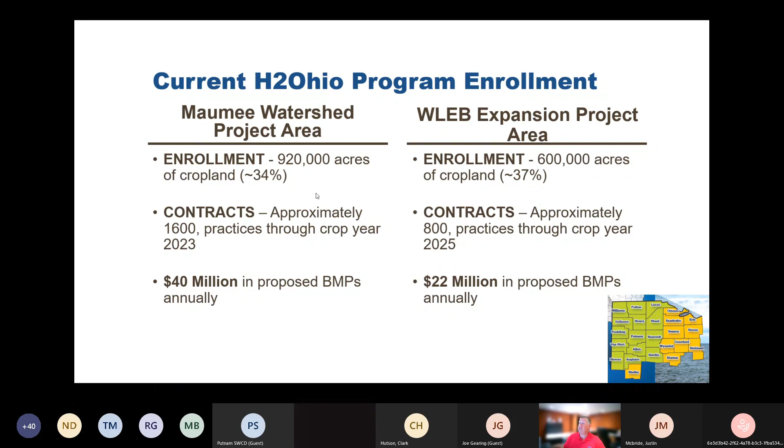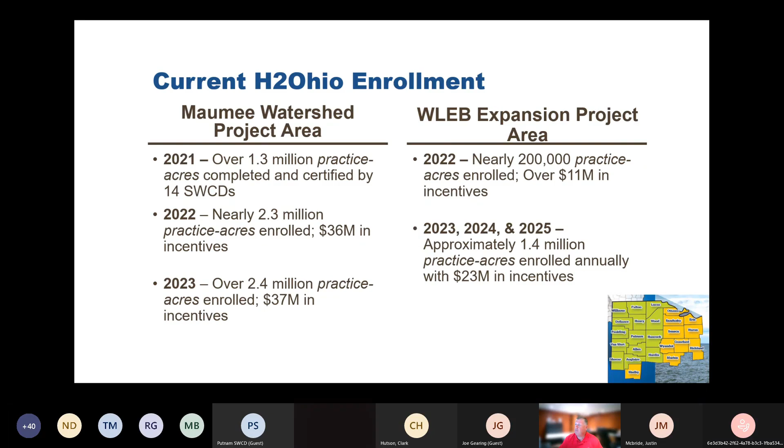Really what we're looking at is trying to maximize the amount of practices that we have installed. You can see for 2021, we had about 1.3 million practice acres, so that's 1 BMP on 1 acre equals a practice acre. Looking ahead, we have nearly 2.3 million practice acres enrolled across the Maumee and about 1.4 million practice acres enrolled across the WLEB expansion area.

One of the things as we look at where we're going with H2Ohio, our focus has been for the past couple of years on the cropland management practices, trying to get those up and off the ground. We are continuing to look at the other practices. We'll talk today about the 2-stage ditches. We'll continue to provide incentives for that effort.

The other thing ODA is doing right now is we're starting to build the next biennium budget. All of the H2Ohio funding across all of the departments, EPA, ODNR, as well as ODA, comes through the biennium budget, and we're just starting that process of updating it now. It looks, from what we can tell right now, that funding into the next biennium has a lot of support from both the governor and the legislature. So we expect similar numbers coming in the 24-25 budget.

But with that said, there's also obviously a long way to go. We've got about just a little under a year-long budget making process until we get to the final results of this. So, Justin, that's my real brief update. I don't know if there's other things that you wanted me to hit real quick. I certainly can, but if not, I'll pass the floor to you.

All right, thanks, Terry. No, I think that did well. That's a good intro on what H2Ohio is generally. We'll go into the more specifics here, which is 2-stage ditches. Let me share my screen. Just a second. Here we go.

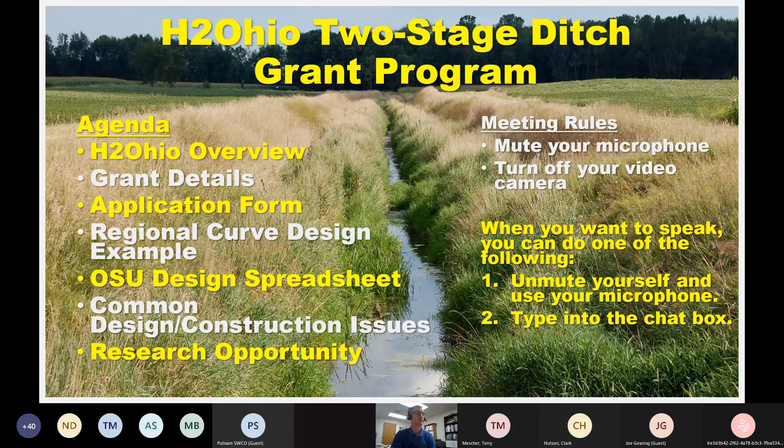And then once I get through my part, which is the first couple of pieces, I'm going to switch it over to a professor from OSU to help go through some actual design guidance spreadsheets that he's got, as well as some issues they found on previous ditch projects. So I suppose before we get into the meat and potatoes of the program, hopefully most of you on this call has at least heard of a 2-stage ditch and have a general understanding of the concept.

Essentially what we're doing is people like to call this a ditch within a ditch. And I don't know if that's exactly true, but basically we take the existing ditches that we typically have in the agricultural setting, which is standard trapezoidal ditches sized to carry a certain storm. They do a good job at that storm, but when you get these smaller flows coming through throughout the year, which is most of the year, quite frankly, it doesn't do as good a job transmitting those downstream.

So you get a lot of things like in the Western Lake Erie Basin in particular, you get a lot of sediment accumulation. That's exactly why we have a pretty intense maintenance program up here where we're going around dipping ditches every year. The two-stage ditch is simply, we're going to leave that bottom part of the channel generally, and we're going to pull the top banks back.

And what this allows is smaller flows will easily go through that short inset channel. Then anytime we get any kind of larger flows than normal, they can spill out onto the benches. It acts like an extended floodplain, and you get all kinds of benefits from that. There's a number of things that happen when you implement a two-stage ditch design.

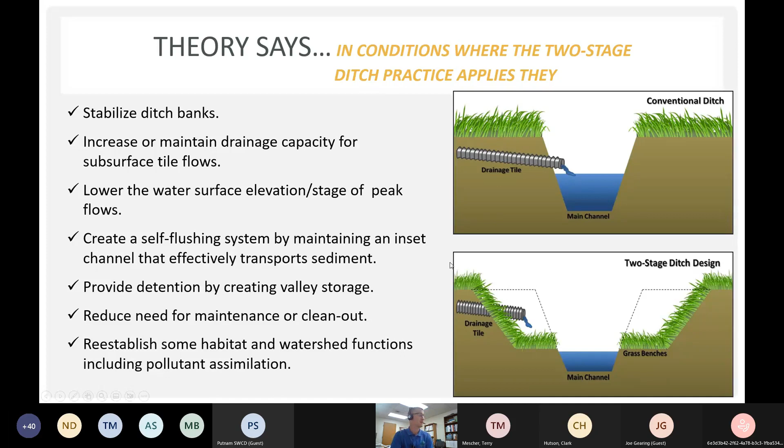Generally, when you have a ditch system that's unstable, you have a lot of bank erosion. Two-stage ditch designs are typically more stable than what the typical trapezoidal design would be. But there are a lot of other improvements that a two-stage ditch system has over a trapezoidal ditch: increased capacity, lower velocities, and things of that nature. We'll go through a bunch of that stuff towards the end here.

This program is going to have a couple main goals. Our goal when we were building this program at ODA was to keep it as simple as possible, use existing infrastructure as much as we can to get ditch improvements out there, and just have a couple overall guidances.

Whatever project we do through this grant program, the final project, once it's completed, is going to be placed on the county maintenance program. That is simply just so that we can ensure long-term success of this project. Not that we expect there to be much more maintenance than the existing trapezoidal ditch. In fact, it's probably going to be less typical maintenance, especially when it comes to dipping out.

But we just want to ensure that there's no kinds of issues that might occur during construction or things of that nature that just get overlooked and don't get addressed after it's built. So that's key number one: whatever project goes through this grant must be placed on the ditch maintenance program in the county.

Some counties are different. That maintenance program may be with the county engineer, might be with the soil and water conservation districts. It doesn't matter. It's got to be placed on that program.

The other goal is we want to make sure whatever two-stage ditches we're putting through this program meet some sort of regionally accepted design criteria. In other words, we're not going to accept a ditch application that is simply what's existing out there, doesn't meet a two-stage ditch design by any standards, but they were just trying to fit it in just to get cost share for the ditch construction.

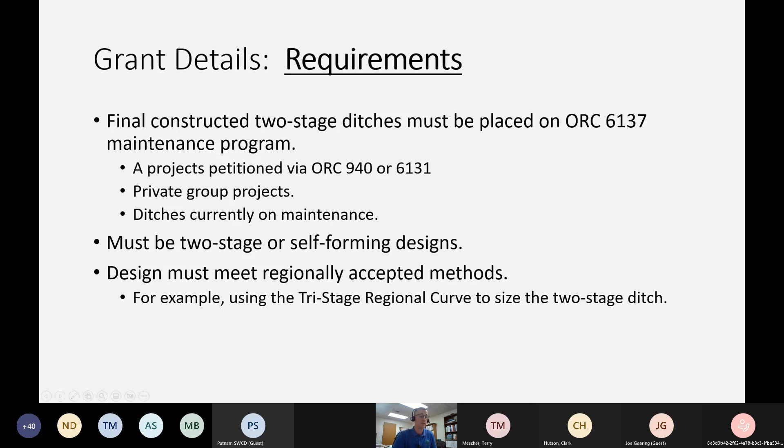So we do want to make sure we're doing the best job as possible to getting these things sized and designed as appropriately as we can. So those are kind of the overarching goals of the program. Everything else was just kind of building out to make sure that we can make this as simple as possible while still getting these out there using the existing petition laws and other ditch improvement methods that we have on the books.

When dealing with two-stage ditch design, there's two that's going to be acceptable for this program. The basic one is the two-stage ditch design, which is just what I said earlier. You're digging down to a foot or two above the bottom of the channel, and then you're leaving that bottom down there for a certain width, and then you're pulling the banks back over top of it at a certain height. So basically you go down here and you pull the banks back and you've got a two-stage ditch.

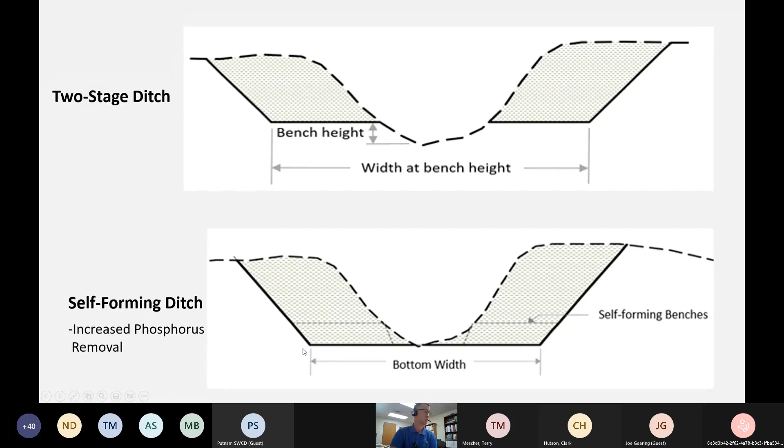For these applications, I'm going to go through the application form here in a second. For this first iteration of the program, like Terry said, it's only applicable in the existing 24 counties that have access to H2Ohio agronomic funds.

Once the applications come in, they're going to be reviewed by us, ODA staff, and approved or denied. The things we're going to need as part of the applications will give us an idea of exactly where it's going, what kind of ditch you're going to be building, what kind of design it's going to be, and what other types of structures and issues you're going to have that has to be implemented with this project.

That's that same area that we talked about earlier with Terry's presentation.

The way the process is going to work is once you turn in the application to us, we're going to go through and do our internal reviews. There's a couple of things we'll look at as we go through those reviews. But once we decide that you meet the minimum bar of what we think is acceptable for a two-stage ditch, we'll approve this project. Then we will develop an agreement that you will have to sign with us, putting the dollar amounts and all the agreed upon steps in writing, so that we can reserve funds from the H2Ohio pool internally until the project is built. Then we can reimburse the billed amounts or what was asked for, whichever one is less.

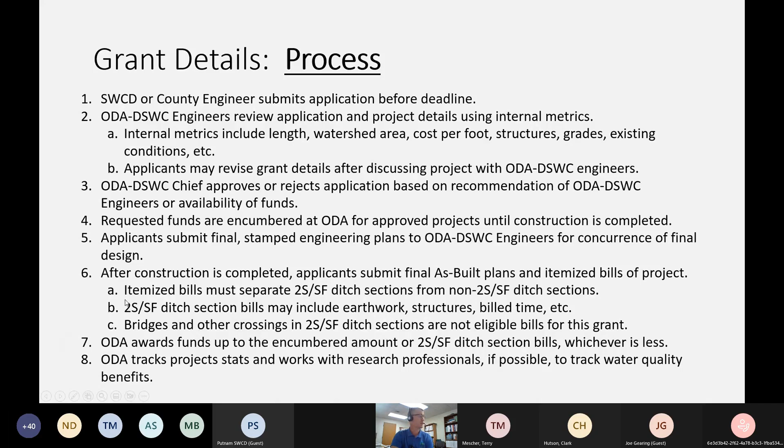Okay, so we'll go to the next slide here. If you got my email I sent out yesterday afternoon, for those of you on that email chain, you should have a copy of this application form. If you have that available, it's probably going to be easier for you to look through it as I go through this stuff.

But if not, hopefully you can see on screen. I've got the whole sheets here, so you might have to squint if you don't have a screen big enough for this section. First page here, just to cover - important part is down on the bottom.

You can see the application period is yesterday through November 30th. If we get to the point where we have a low amount of applications coming in and we get closer to the end, but we hear that there's several on their way that just haven't been fully developed yet, we may extend that a little bit, but that's going to be at our discretion as needed.

And any other future program that we have - let's say this is the 2022 application period, we may have a 2023, we may have two in 2023. This may be the first and only. All those things to come will be at our discretion as well down the future.

First page here, just some general information about H2Ohio. Terry covered most of that stuff, how the money works out. The big one here is in the third paragraph - you can see that we have allocated $5 million for the initial offering of this two-stage ditch grant program.

That's something we'll keep track of internally as we go. Just know that $5 million could increase, could decrease. The way H2Ohio funding has worked is that there's been some slippage in some of the other programs, and so generally there's a certain amount accessible at any time. So we may be able to go over that $5 million, but right now that was the goal for this first iteration of the program, certainly.

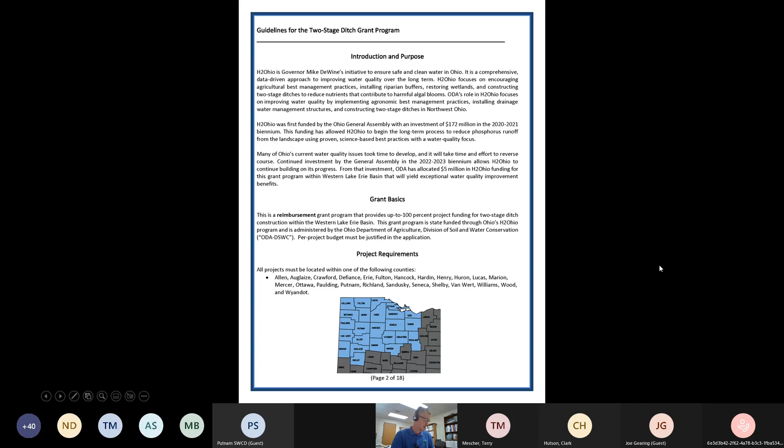Then just below the grant basics, you can see the first sentence says this is a reimbursement grant program that provides up to 100%, not exactly 100%, up to. And I'll talk about why you might not get the full 100% if you apply for this.

Okay, going to the next page - this is page 3, Part 1. Again, I talked about the two types that are eligible. We'll go into more of those design equations later.

Part 2: projects that would be ineligible for this program. Again, if there's no way it can be placed on the ditch maintenance program in the county, we're not going to consider it acceptable. There may be other grant programs out there, maybe some 319 GLRI grants that are separate from this, that you might be able to get enrolled in. But for this one, it's got to be on that ditch maintenance program - no questions asked.

Any projects outside the eligible 24 county area - originally we had thought about maybe cutting the break off at the watershed border, which cuts through a bunch of the border counties. We decided for ease of implementation not to worry about that - all of the counties shown on the screen are going to be eligible, even if it's outside the watershed. There might be some funding differences about what fund pool it comes from, but that's not anything you guys have to worry about.

Part 3, for the allowable costs for this program, what can you submit to get reimbursement for? First, obviously staff time. If you have technical assistance for the project, you can certainly record and request all of that.

The earthwork, obviously, with the two-stage ditch, as I talked about, you're going to be pulling the banks back. You're going to be making a much wider ditch. There's going to be a lot more earthwork, so obviously that's going to be the big expense of most of these projects.

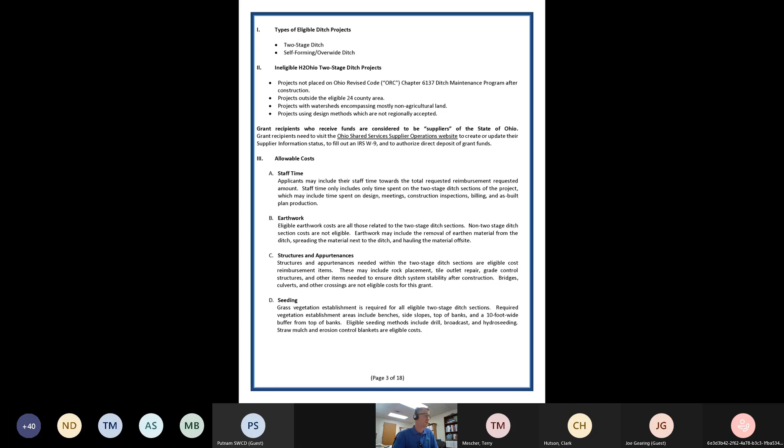Couple things here in that first paragraph. There's one sentence that says ODA is not responsible for future maintenance costs as required by the established county maintenance program. The idea is once this project is completed, once you've been reimbursed, it is entirely the county's baby. We have no more strings attached to it, which is good both ways.

There's nothing we can tell you later on that you have to do, but also there's nothing later on that you can come to us and say, well, this is ODA's project, you should have to fix it, ODA - that's not going to be the case. Once we've reimbursed, it's a clean severance. It is now the county's ditch and their responsibility to take care of.

Part B under section 4 here is eligible applicants. Again, the only people eligible for this program are going to be the Soil and Water Conservation District and the county engineer for each county. Some counties have soil and water districts that do ditch petition projects, and this will fit right into their program. Others do not have that, and so those counties may have a struggle to go through the standard 940 process. In those cases, you may want to work with the county engineer to maybe put the application through them, but you can still work with them to provide support and things of that nature.

Private landowners are not eligible, not directly - these are going to be multi-landowner projects. Obviously, that's why we're trying to target most of the petition projects going through here. You will probably have some landowners coming in and say, I hear there's a new program for 2-stage ditches, I want to apply. That's not how this is going to go.

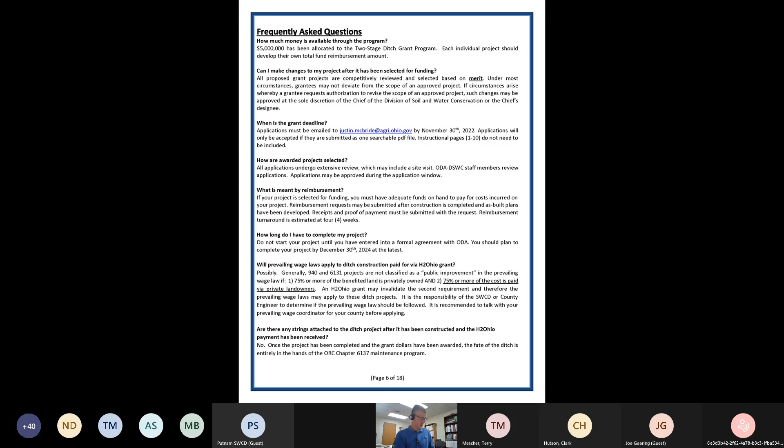All right, let's go to page 7. What additional management is required on 2-stage ditches beyond normal ditch maintenance? We'll talk about this a little bit later, but there's not really a whole lot more that's expected. If you're currently spraying the ditches for noxious weeds and things of that nature, you'll probably continue to do that on 2-stage ditches. We're certainly expecting less sediment to accumulate in these ditches just by the nature of their design.

But there may be some additional spraying. You can design entrances to get down to the benches if you want to mow the benches and things of that nature. There are things that you can do. So certainly keep in mind that the maintenance may be a little bit different than a typical trapezoidal ditch, but we're hoping it's going to be less overall.

So are all sections of the ditch project required to be 2-stage? Absolutely not. If you have a ditch project that's a couple miles long and based on the local landowner who's there, you can only get in maybe 3,000 feet of those 2 miles, then that's totally fine. Just know that we can only pay for the reimbursement for the sections which are actually constructed to 2-stage ditch. So certainly flexible there.

What if the H2Ohio grant doesn't pay for 100%? That's where your normal watershed assessments for a petition project would come into play. So whatever's extra, whatever's needed, certainly use those methods to get the funds that are required to finish the project.

Does ODA pay for the additional top width easement needed for a 2-stage ditch? As we'll get into, 2-stage ditches do require wider top widths overall, typically. And so that's ultimately one of the complaints, one of the resistances from farmers, is that they don't want to give up that much land, or that much additional land, I should say. And while we're not putting that outright in the application form, certainly if a county engineer feels that it's appropriate to pay a landowner for taking their farm ground away from them, they can put that certainly in the cost request for this application, but it's not required.

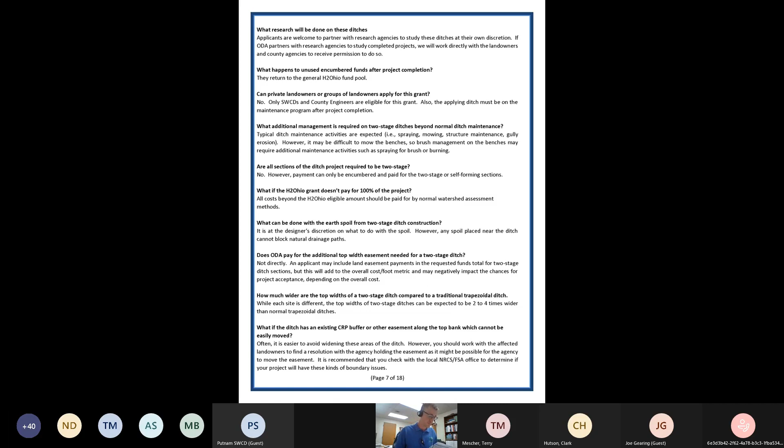Okay, page 8, H2Ohio two-stage ditch projects application process and timeline. During this application period from now to the end of November, we're going to be receiving applications and looking through them during that window. If we think projects meet the minimum bar, we will try to get agreement forms put together as soon as we can to get those signed. So there may well be projects with signed agreement forms for funding before the end of the year. That would be ideal, but as long as the application comes in before the end of November, all those can be weighted together.

The agreement deadline we've set is the end of the year, December 30th. So theoretically, if we get an application at the end of November, that gives us 30 days to put together an agreement form for that project if it becomes approved. That may be a flexible deadline depending on how long it takes us to get those agreement forms put together, but we did put a date on there, just FYI.

For implementation and construction, you have until the end of 2024 for all approved projects. Project completion is at the bare minimum December 30th, 2024. As soon as the project's completed and we have bills we can verify, we can release funds to the project. So it doesn't have to wait until the end of the year, but you can certainly go up to that time. Okay, page 10.

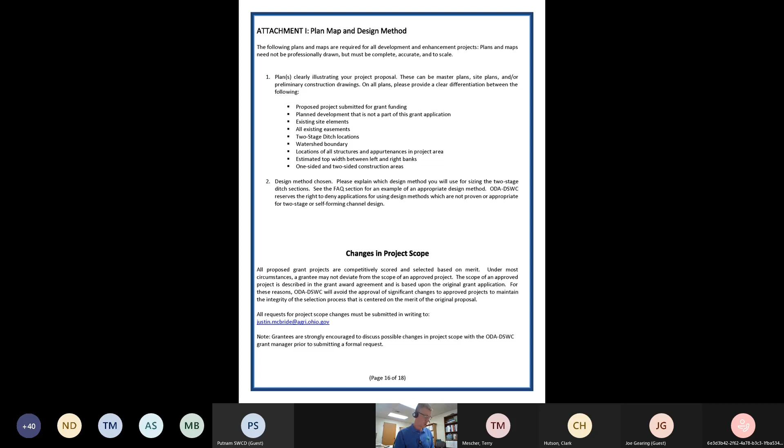Down at the bottom, the changes in the plans, we talked about that. We hope there aren't many changes, but if there are, we can work with you through that process. You can read through the steps to complete the project. I'm not going to go through this since it's pretty self-sufficient in wording. You can read it.

Page 18, grant application checklist. Just a helpful checklist—make sure you have Forms 1, 2, 3, and 5, with 4 being optional. I know it's not written there, but keep in mind Form 4 is optional for now. Perhaps in future iterations of this program we may require it, or a different version of it, who knows. But we put it together just in case you wanted to use it.

The very last checkpoint is when you send these applications to me, try to put it all into one PDF file. That way I can store it as one file and don't have to refer to a bunch of other files when I pull yours up to review it. Anything you can do to put it all into one single PDF file would be fantastic for me. So that would just be helpful.

Okay, so now let's get to the actual training part of the webinar. That first part was more about the program, the application we want you to use, and then good luck. This part's going to be more about how, if you're going to do a 2-stage ditch design, how are you normally going to do it?

Generally the way we see it, most people like to use the regional curve design method. There are other ways to do this, and you'll get to hear about another way after this one, but most people use this method.

These tri-state agricultural ditch regional curves were put together by OSU, and they do a fairly decent job of representing the types of watersheds we deal with in Northwest Ohio. That's why we tend to gravitate towards these equations for two-stage ditch design.

It's quite simply two equations. There is the width equals 6.9 times drainage area in square miles to the power of 0.42 for the width, and for the depth, it's the drainage area to the power of 0.32. Again, those are both in square miles.

I didn't put that on the slide, I probably should have. My bad. But those two, the width and depth, what those represent, and I'll talk about this more, is the width and depth of the inset channel, the smaller channel within the bigger channel, if you want to think of it that way. The width is the top width of the smaller inset channel, and the depth is simply the depth of that inset channel.

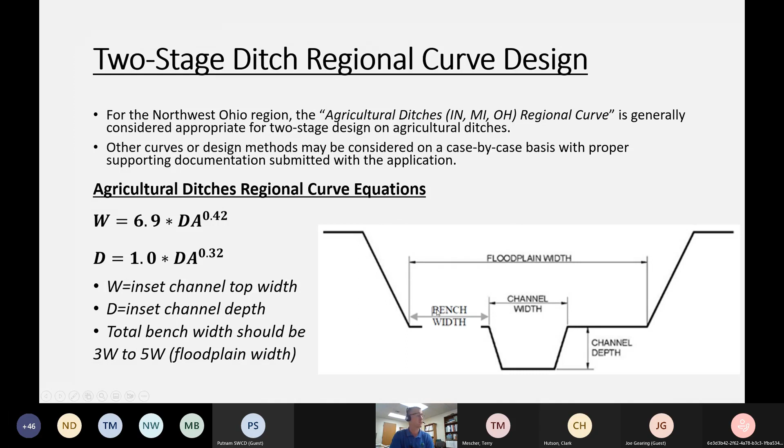Everything from there can be found out by picking your floodplain width ratio. Okay, couple things to note when you use those equations.

The benches, even though I've shown them here to be the same width on both sides of the inset channel, they don't need to be all the same size. We would just prefer that it's not totally one-sided construction. There have been one-sided constructions, but typically that's where more failure is expected, not necessarily guaranteed. So we do like a little bit of bench on at least both sides if possible, but it's not like you have to have the inset channel right in the middle of the benches - it can be offset a little bit to one side or the other.

The current channel size, the ditch that you're going to be out there when you first do your survey of the site, is likely to be different from the inset channel, and that's a given, right? We're going to use an equation to come up with a size. It's a high likelihood that the bottom width of the existing channel that's out there is going to be different than what we calculate with the equations, and that's not a problem. We can talk about how to adjust to that.

Flooded width sizes are guidelines and can be adjusted by 25%. Again, there isn't anything set in stone here. If we have to fluctuate a little bit, that's totally fine in the designs. As long as the benches out there are doing their jobs, a little bit wider is not a big deal. The depth, typically the shallower the better. So if you're going on those equations to calculate the depth of the inset channel and it comes up to like 1.33, then typically you want to round down to 1.3. That's okay - you generally don't want to go deeper than what those equations suggest.

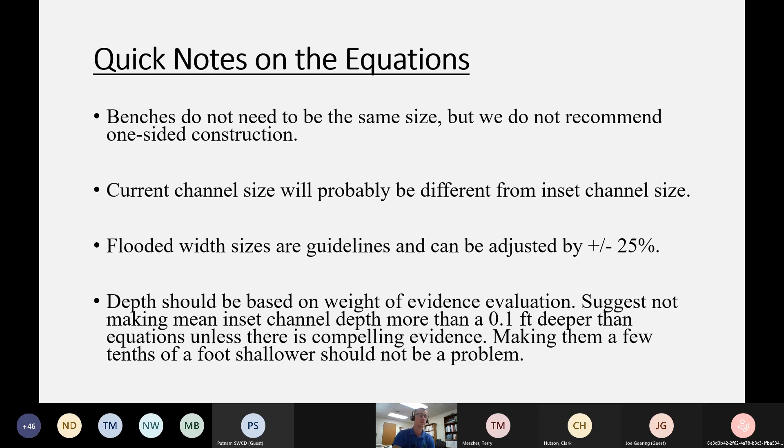Okay, so we can use those same two equations for the two-stage ditch for the inset channel, and we can rearrange them with a couple of assumptions to calculate the bottom width of the overwide trapezoidal channel, the self-forming ditch as we call it here.

So just by doing some algebra, you can rearrange them. You can choose floodplain widths. You can come up with 3 different equations based on the floodplain width here. And ultimately what these equations give you, if you pick one to use, these give you the bottom width of this overwide channel.

And from there, you have your design grade and elevation. You can just go a 2-to-1 slope to get to existing ground. So probably pretty easy to design, pretty easy to construct. It's just a lot of dirt to get to that point.

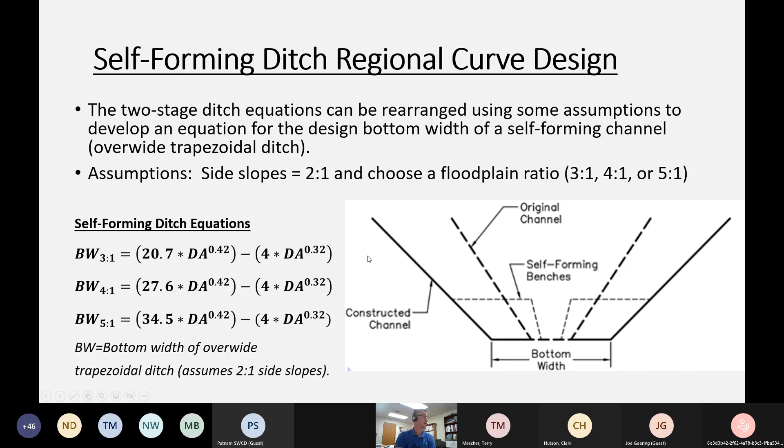Let's do a quick example. I have a given watershed size of 2.46 square miles. The grade for the section that we're in is going to be 0.1%. The existing ditch, or a typical standard trapezoidal shape, is going to be 8-foot bottom width, 5-foot depth, 2-to-1 side slope, which makes a 28-foot top width.

That's the footprint of the typical trapezoidal ditch we would do in this sort of general scenario. When you plug all those into the equations, the existing bankful capacity is 218 CFS. For the watershed I picked, and there's a lot of assumptions, this is in Hardin County with a curve number of 85, standard watershed slope of 2%, and a watershed length of 2.52 miles.

Your projects could be vastly different than this. You might be in the Great Black Swamp area, maybe Henry County, with an average watershed slope of 0.5%. That's going to drastically change the data up top, obviously. But this is just what I picked for this example.

I've got some flow rates here for this watershed. You can see the QB flow, which is the Soil Conservation Service drainage curve for excellent drainage. If you're a county engineer and not familiar with QB or QA, it's something we use in the district world quite often. But typically when we teach ditch design, we want to meet at least a QB flow. And that's exactly what the ditch does, it gets us somewhere between a QB and a QA flow, which is pretty common for the ditch work I've seen up here in Northwest Ohio.

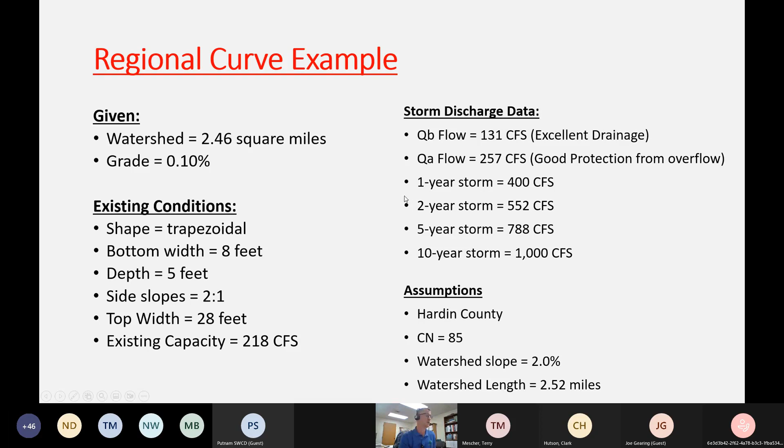So if we apply the two-stage ditch design equations to this, we come up with the inset channel width of 10.1 feet and a depth of 1.3 feet using those same equations. We plugged in the 2.46 square mile area, and that's what we come up with. We chose a floodplain ratio of 4:1, meaning we simply take the width of the inset channel and times that by roughly 4. So that'd be 40.4. In this case, to make things simple, I just made that bench width 40 feet.

Okay, so there's a little bit of flexibility here. You don't have to pick exactly the 10th decimal type of things, because we're still going to have pretty good benches out there. So I chose 40 feet for the bench width, and then you can do some algebra and basic geometry and come up with the overall top width of the finished two-stage ditch to be 54.8 feet. And if you're familiar with the Manning's equations and the continuity equations, you can figure out the bankful capacity is now, for the same grade, 452 CFS for that same area.

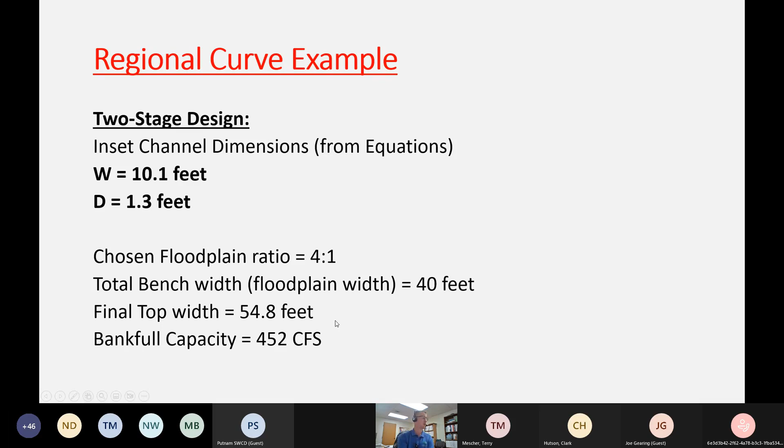Instead of doing a standard trapezoidal ditch, we are now doing two-stage, and we can carry twice the amount of flow, which if you know anything about those equations, you know that when you increase the cross-section area, you're obviously going to increase the capacity.

So if we then apply the self-forming design, which is the same thing as a two-stage ditch except that you're taking out the benches, you're building an over-wide trapezoidal channel, and we pick that same 4:1 floodplain ratio just to get an idea for apples to apples. Then we come up with a bottom width for the overwide channel of 34.9. There's a little bit of rounding error in this, so that makes the final top width 54.9 as opposed to 54.8 for the two-stage ditch.

So it's exactly the same. And then because you took out those benches, you obviously have additional cross-sectional area, so we can carry a lot more capacity. In this case, 655 CFS.

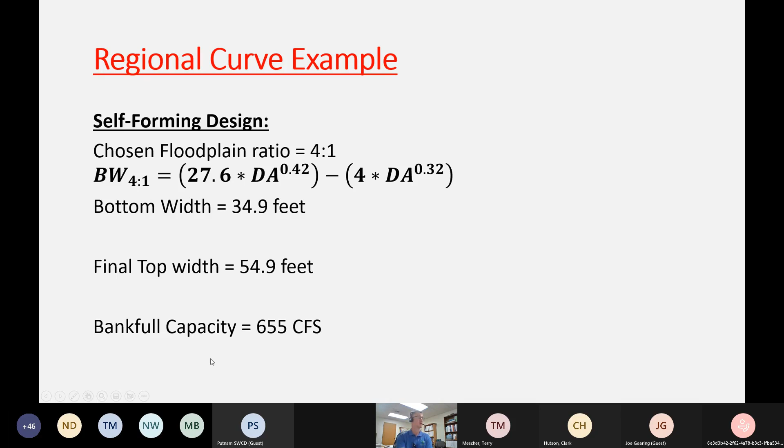And if you compare those three, the existing trapezoidal ditch up here to the two-stage ditch to the self-forming design, you can see the differences in the top width. Obviously they're going to be the same for the two-stage and self-forming in most cases, but you can see that both of them are about twice as wide as what the existing trapezoidal design would have given us. But then they also have 2 or 3 times as much capacity.

And so when you hear people say that two-stage ditches help reduce flooding, certainly when you're going from a Qb flow that floods frequently to where you can carry a Q1 storm for a 1-year storm event without overtopping, or even a 3-year storm event without overtopping, you're going to reduce some flooding. Now, obviously, some areas are still going to have much bigger storms than a 3-year storm, and so you might still have some flooding, but that likelihood is a lot less. The impact is a lot less.

Okay, and then here I put down some estimated earthworks. Those are just the difference in areas between them and the existing trapezoidal ditch. So you can obviously see that for every foot of the ditch you're going to construct to a self-forming ditch, you're going to be taking out at least 5 cubic yards of dirt. And so from there you can start to put together an estimate on your earthwork as you go through there.

Over time, the self-forming design, the overwide design, it's going to build its own benches like I talked about. So over time this capacity is going to reduce as those benches are built closer to the capacity of the 2-stage ditch. Now that may take 10 years, 20 years, 30 years, may never happen. It just depends on each situation, but there is going to be a drawdown on the capacity of the self-forming ditch to eventually reach an equilibrium state that should be around the 2-stage ditch design.

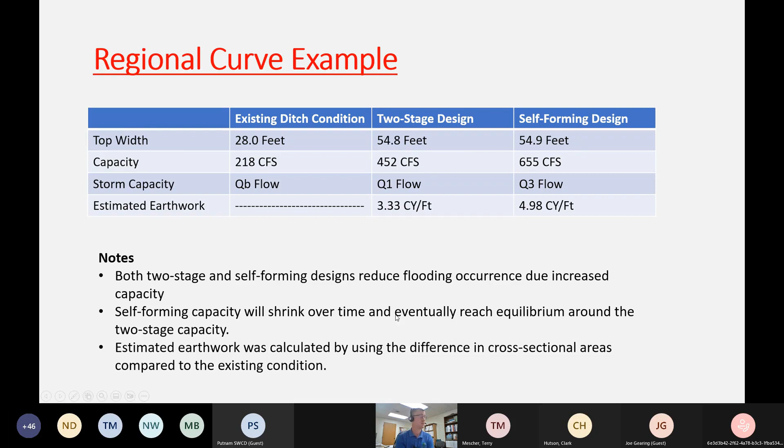I just drew this about an hour ago, so there's sort of lines going everywhere, but the standard trapezoidal ditch design here has a 5-foot depth going across, an 8-foot bottom width in the black, and then a standard 2-to-1 side slope. You can see the increase of top width to get to both the 2-stage and the overwide design. Depending on which one you choose, if you do the 2-stage ditch design in blue, you would leave a bench 1.3 foot deep to this width, and then remove this 3.7 foot depth out to this bench width. But if you were to do the overwide design, you would just go ahead and dig all the way down to the bottom grade and get a bottom width of 34.8 feet, then build your standard trapezoidal side slope and let the benches build over time, like I said.

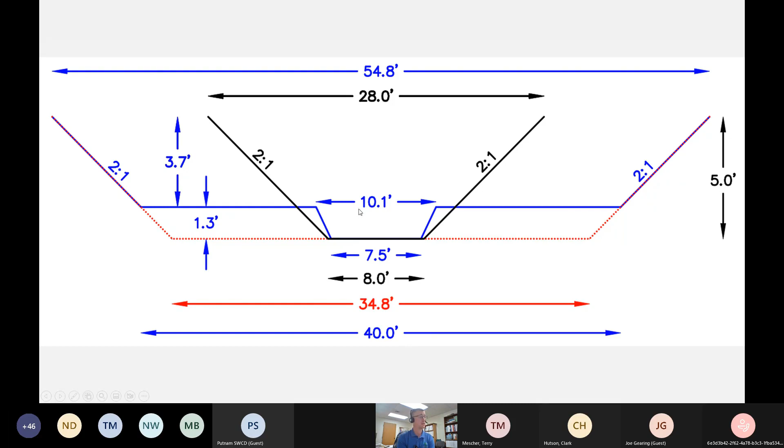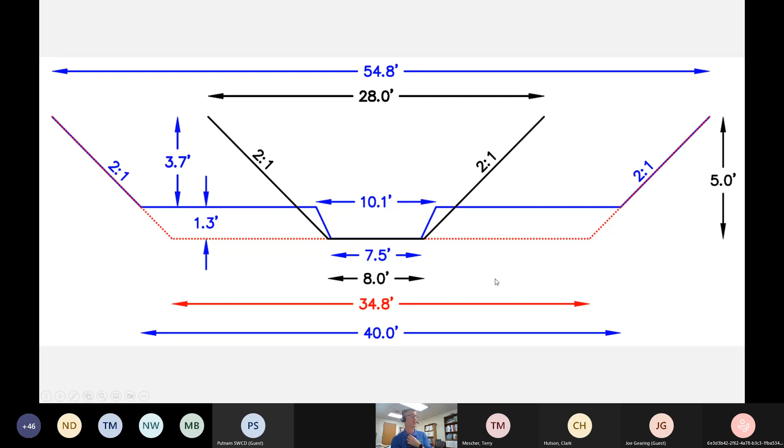And you can see that there's going to be a situation here where the design bench is actually inside of what's existing. So obviously we can't build earth inside of what was already out there, or at least that's not ideal. So it's perfectly fine if you run into this kind of situation to not construct these benches out to this defined top width. In other words, you can leave the top width of the inset channel to, let's say in this case, 15 feet to get from this point to that point. That's totally fine, it doesn't have to be exactly 10 foot wide, but you can just make it fit to what you have. Hopefully that's not too confusing — that's something we can clear up with you as you go through the designs, but that's the idea of how this all works.

Justin, you do have 2 questions in the chat box. The first question is, can a county apply for more than one project? Yes, that's an easy one.

Question number 2, from Megan in Crawford County: Who approves the final site construction approval, ODA or the county engineer's office? Final site construction approval is the county engineer's office or the district, whichever one's taking care of the project. It is the payment that they're looking for, I assume is the question, who approves the payment. That payment approval will be a review from the engineers at ODA after the finished construction project, just to make sure that the quantities line up with what was actually built. So when we sign off on something at the end at the ODA level, we're not signing off on the actual design and construction of the project, we're signing off on the payment that's approved for the project.

Okay, hopefully that makes sense. Hopefully, Megan, that answers your question. If not...

We have a question: how many years is this funding going to be available for? That's a question for you, Clark.

Well, as Justin said, we've got $5 million worth of funding for this year. After we get this first round of applications, we'll take a look, and if there's still a lot more projects that could be done, we'll be looking for additional funding in the next budget year and so forth. If this is a popular practice and we can get a lot of these done, hopefully we'll have funds available to continue to develop these through the next several years.

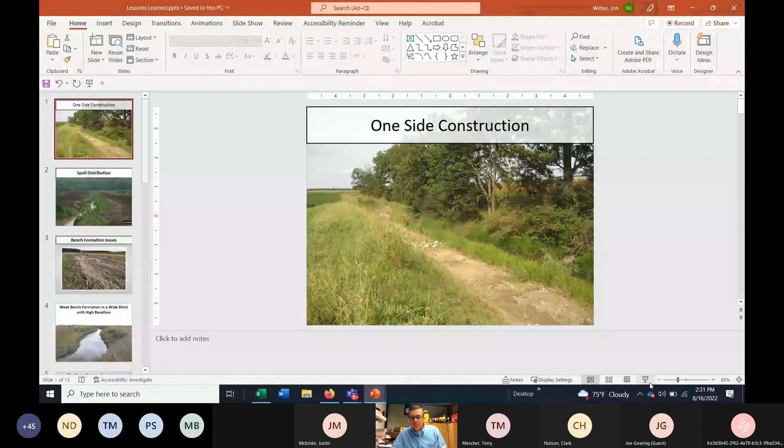All right, thanks Justin, well done on the presentation there. Justin asked me to maybe share a few lessons learned over the years. He maybe already covered this a little bit.

You can do one side construction. I do think it's ideal to try and get that inset pilot channel with some bench on either side, I really think that will help with stability. But if you do go ahead with one side construction, we would recommend just making sure that that bench is 2 times the bank full width. So don't cut the bench width in half just because you're doing a one side construction.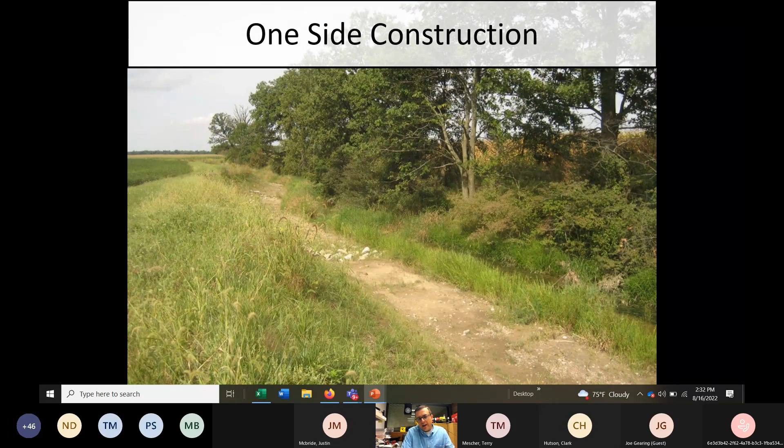Sometimes you may not have an agreeable landowner that doesn't want to do the other side, or you may get trees which make it cost prohibitive to remove all of that. But I can say if you have bank stability issues and you don't put a bench on that side, even if you do put it on the other side, there could still be some problems. So try to do the 2-sided construction whenever possible.

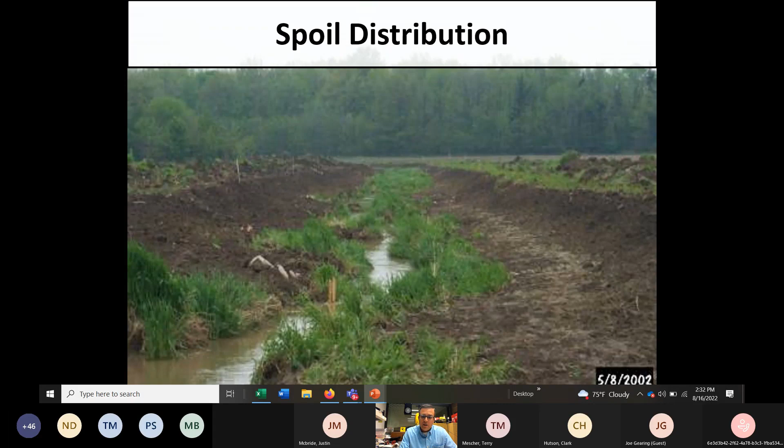But if you do go ahead with one-sided, make sure you keep the 2 times bank full width bench on the other side. Take into account your spoil distribution. We're trying to do some research right now to see what are the benefits or impacts of spreading that on the field. I do know if you spread that right next to the ditch, making sure there's a way for that surface water to drain down into the ditch is important. So think about your spoil management while you're doing all this. Some folks may not want that spread out too far, so in worst case scenario some of it may be trucked, which greatly increases costs.

We have found that in ditches with very small drainage areas and very low slopes that don't have very much energy, they may tend to be more of a wetland system, especially if vegetation gets in there real thick. So if you're in a low drainage area, low slope situation, we have looked at hundreds of these ditches where we can determine which ones become more wetlandy and aggrade versus a 2-stage ditch, which becomes more of a self-flushing system over time. If you're on that low energy side of things, maybe we can help look at that, but it's possible in that situation you could end up with a wetland versus that compound 2-stage channel that becomes self-flushing.

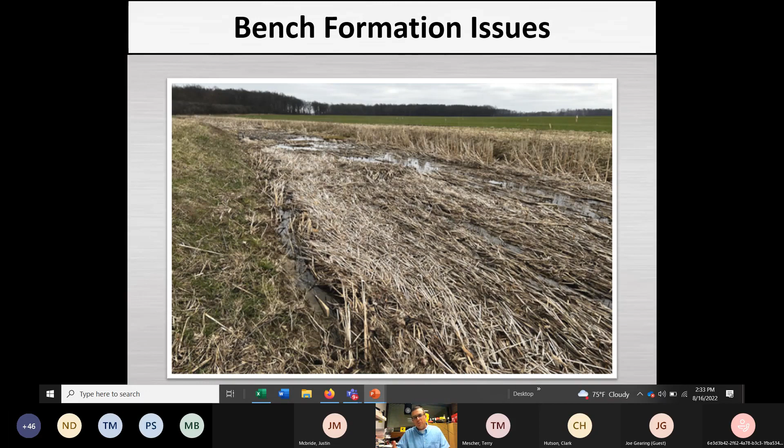Another area where we've seen some issues where maybe the benches won't form very well is if you do have a high base flow. This is a ditch up in Marion County. It actually did have enough width to create benches, but there was constantly a high base flow, so it didn't allow that vegetation to come in to start narrowing up that channel, providing the roughness on the benches to get the sedimentation. So where you do have really high base flow, even if you have enough width, it may be questionable whether or not that two-stage system will form.

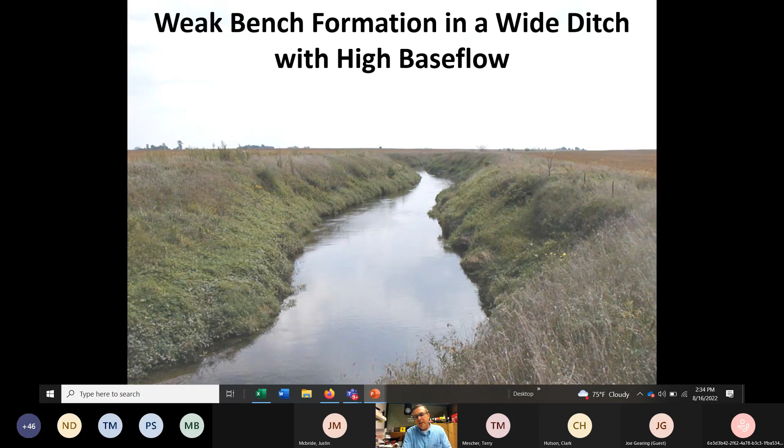Tile outlets - if you have a tile outlet that comes out in a bench, it's pretty low in the ditch. As long as you have that compound channel that keeps the outlet depth good, keeps that fast, deeper water flowing, I think you can outlet tiles through a bench. Where I'd be a little more wary is where it comes out right at the bottom of a ditch.

I would really recommend against doing one of the self-forming channels there, because you really couldn't control where the sediment deposition is going to be, more likely to clog it. So, having the tile outlet onto a bench or through a bench in a two-stage system, I think that'll still work, but I'd be a little cautious about where it meets right at the bottom of the ditch. You may have to lower grade a bit in that sort of scenario.

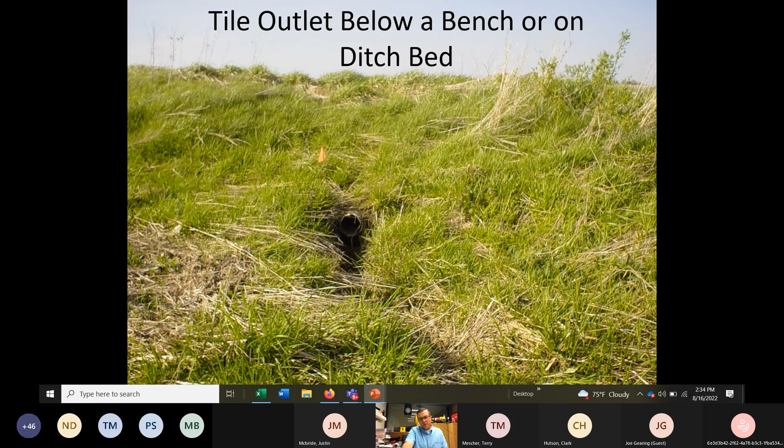See, here's an example where we've got a trapezoidal on one side and then the bench on the opposite side, your riprap aprons, those sorts of things. But I can say, don't let your pipe outlet too far.

It can cause some turbulence, some erosion in some areas. And if that water can outlet, even if it's onto an apron, if it flows through this bench, this buffer strip at the bottom, some of the early research shows there's a huge water quality benefit for letting this flow go through those benches. Really high nitrate removal, and then we think some phosphorus removal as well. So on your designs, try not to make them too obtrusive where you're going to cause turbulence and some erosion and scour.

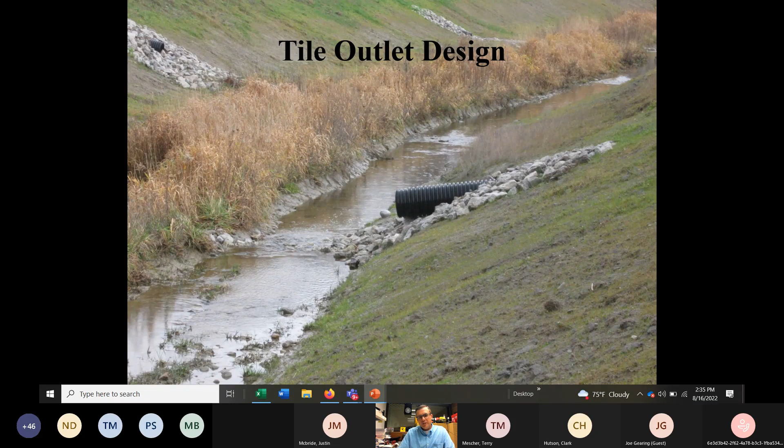Also know what layers of soil you have. In this particular case, this was a project in Indiana. And when they widened out the benches, they exposed this gray clay layer. And when it got saturated, it just fell apart, it just eroded away. Now, in the time since, it almost became self-forming in that case, where it was constructed as a two-stage, the bench washed away, and then over time deposition has occurred and those benches have reformed. But all of that erosion could have been avoided.

So if there's any layers you're concerned about not being resistant to the flow while the vegetation gets established, that might be a concern, and if it is, you might need some sort of erosion control to deal with that. The other big thing we see is uncontrolled water flow over the side, getting real erosion, gully erosion. So make sure you've got a good plan for getting water from the field edge down to the bottom of the ditch without overflowing uncontrolled on the banks.

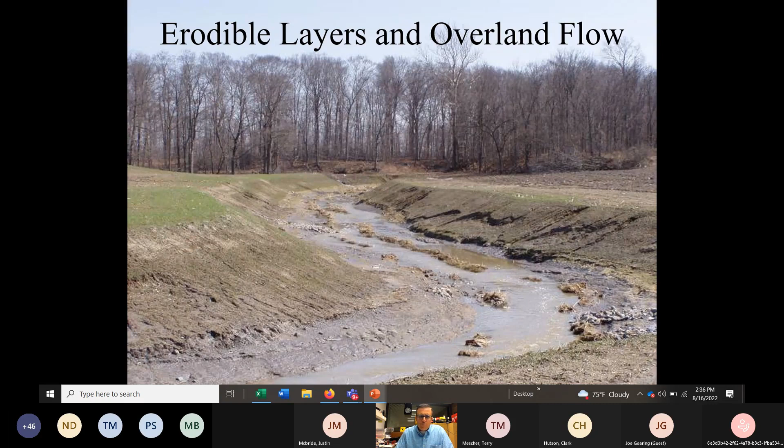And then I think Justin mentioned this earlier, some of the tools we have can predict these flow velocities. Where you do have high flow velocities, often on the outer side of a bend, perhaps you need to provide some erosion control, some riprap. One of the biggest things we can do is get that vegetation established really well, so it's got a layer of armor on it to keep it in place, to keep it from unraveling.

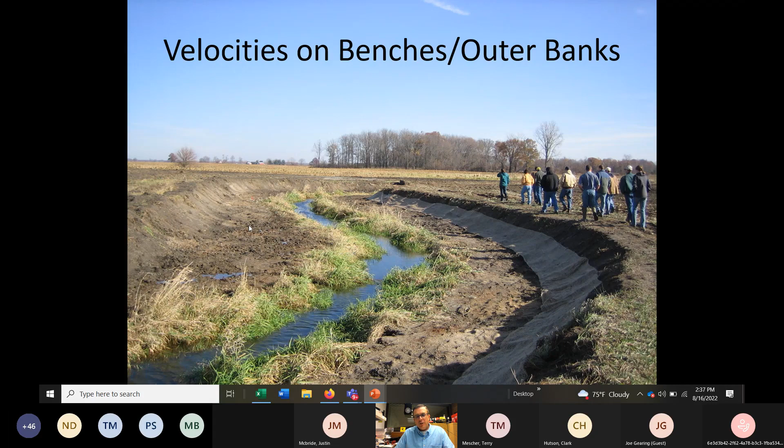The other thing is, a lot of times when you're constructing, if you have small benches that have been deposited, so you're already getting these benches forming, during construction we usually try not to remove that vegetation, because if these are deposited silts and sands, you can destabilize those and they'll go downstream. They'll probably rebuild, but what that does sometimes is, when you get higher flows, you have more roughness along the channel margin, and it can push some of the flow out onto the bench. So hopefully those flow velocities up here aren't going to be too high. If they are, think about your erosion control.

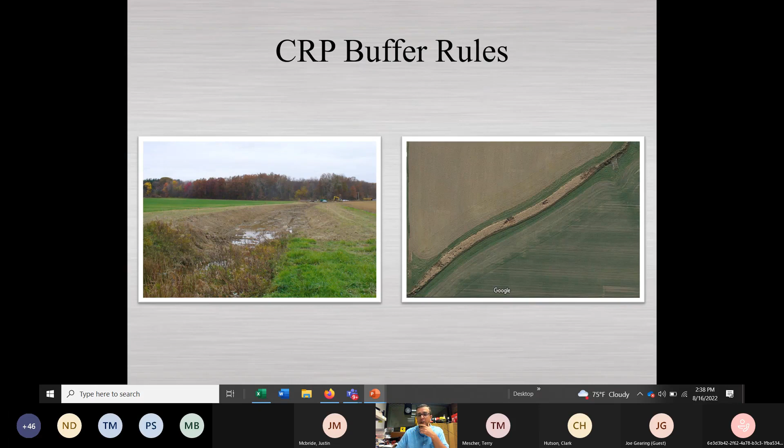Justin already touched on this, your CRP buffer rules. If you're widening the ditch, you'll need to work through the issue of whether or not you need to extend the buffer, whether you can even extend it. So just be aware of other programs bordering the ditches that you're enrolling in.

And I think one of the best things we can do is just make sure you're doing good vegetation establishment practices. Getting that good layer of vegetation on there is really important for protecting that, getting those compound channel hydraulics where you're getting the fast flowing water in the inset channel that's going to scour the bed and keep that clear, and then the slower moving water up on the benches where you can get slow water treatment of the nitrates, deposition of a little bit of sediment, and some of the soluble phosphorus adhering to those soils.

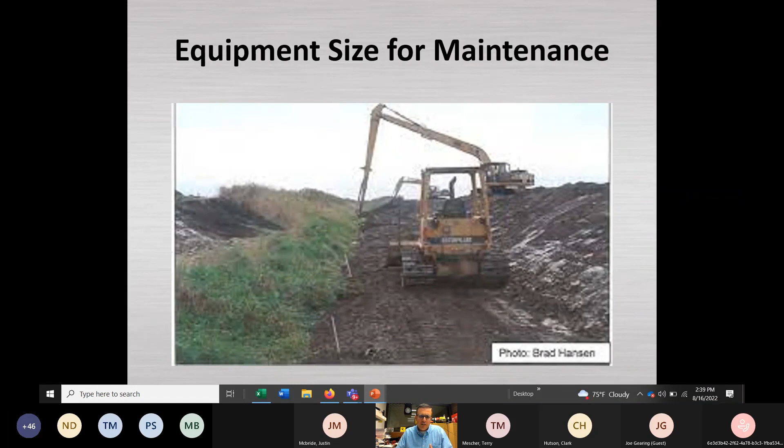I know a lot of you are really comfortable in AutoCAD, or you have other programs you're making these design calculations in. We have another one, and I'm just going to go through the highlights today. If you're looking to do some ditch design and calculate earthwork, and you want flexibility to look at how much earthwork there is with different bench heights or bench widths, Justin gave the example of 4 today, but this tool will help you run through how much earthwork there is if there's a 3-to-1 bench ratio or a 5-to-1.

So it's got a couple of tabs at the bottom. We have an instruction page. My colleague Dan Mecklenburg, who used to be with ODNR and is now at Ohio State, has written a lot of this. There are a couple of simple inputs - you just pick what units. I suspect you're going to work in English units here.

We need a drainage area that you can get from somewhere like Stream Stats. You can put in some details, like what watershed, what's the name of your ditch. If you want to put some coordinates and those sort of things, those will translate to the outputs.

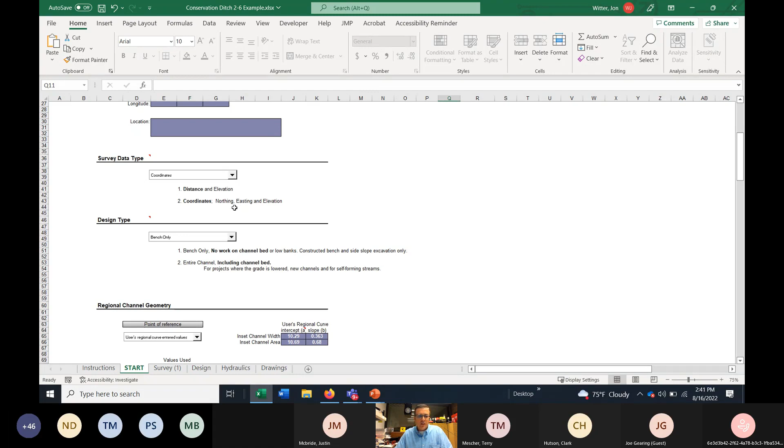You can do a couple of survey types. If you want to do a profile type leveling survey where you have stationing from the top to bottom, and then distances and elevations at cross sections, you can add that. Or if you're out there with GPS and getting something in state plane coordinates, you can choose the coordinates. That's the example I have here today.

And then we have our design types. Do you want to do the bench? Do you want to do the two-stage? Do you want to do the self-forming? You can pick which design you want, or you can just toggle between the two - how much earthwork is it if I do a two-stage, how much earthwork is it if I do a self-forming.

Here's some of the inputs, that regional curve Justin was talking about. This example I've got here today is for something we did for folks down in Arkansas. They had a little grant program down there, and their inset channels were much wider - in our case it was 6.9 to the 0.42 drainage area. This is where you'd put those curves, or we have pull-down menus if you want the Northwest Ohio curve or the Eastern US. So we have some pre-populated regional curves, but this is where you would put those regional curve numbers that are in the application Justin shared with you.

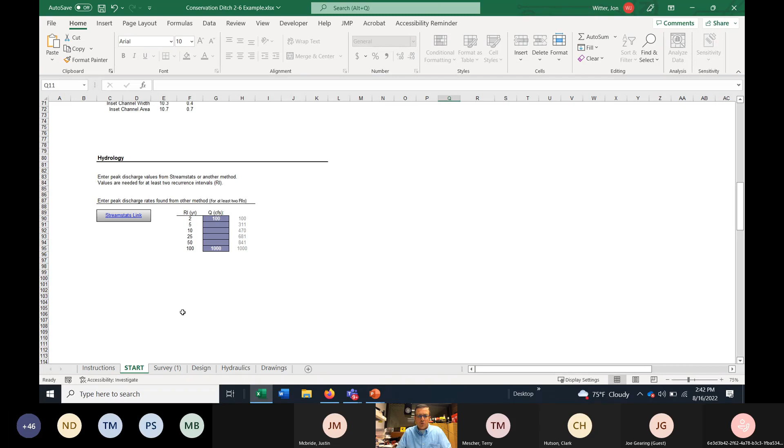The other thing you can do is if you want to calculate the at-a-station open channel hydraulics, you can put in anywhere from the 2 to the 100-year flows. We oftentimes use Stream Stats - Justin suggested another method today - so you can just put those hydrology calculations there.

And then we have our survey page. Each survey page can hold up to 12 cross sections. You can cut and paste this up to 4 times, so it'll hold up to 48 cross sections. If you copy and paste this sheet, it automatically links them, so it's nice and simple. What you do is basically paste in your survey coordinates and elevations, and then it will plot the existing ground.

Based on whatever design criteria you've put in there, it will come up with the proposed cross section. In this case we have a 2-stage design. We actually have this set up so that you can change the bank - maybe you want to build a 2-stage but don't want to build it to the endpoint, maybe you only want to build it to half the endpoint so you can trap a few more nutrients, those sort of things.

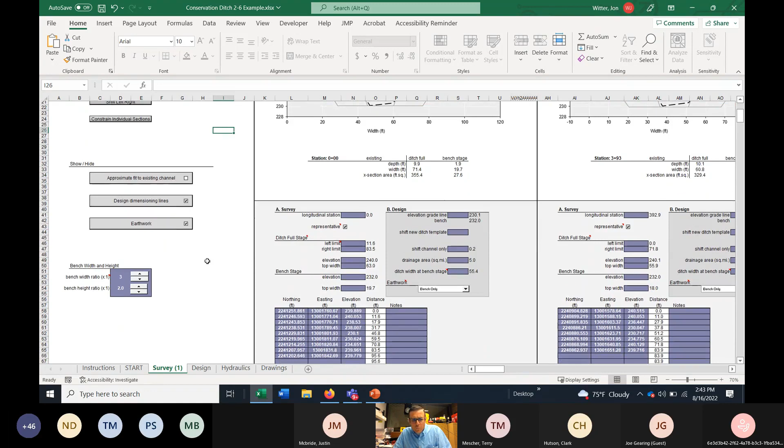We've actually got little sliders here that allow you to change that on the fly. We can also change the bench width ratios here - so if you want wider benches, this is 3:1, so our inset channel is about 1 width, and then you have 1 on either side. But if I want to see what it looks like for a 4x design, all we have to do is use the little slider and it'll make the benches wider. So it's pretty user friendly.

Once we get there, it'll take all your cross sections and plot the lowest point for your profile, so you'll get an existing bed. You can actually lower the bed in your design on our design tab. It'll give you the bench elevations, the existing bed elevation, and if you have a proposed elevation, these little triangles are every cross section we have. It'll also plot the top of the ditch and give you a typical cross section.

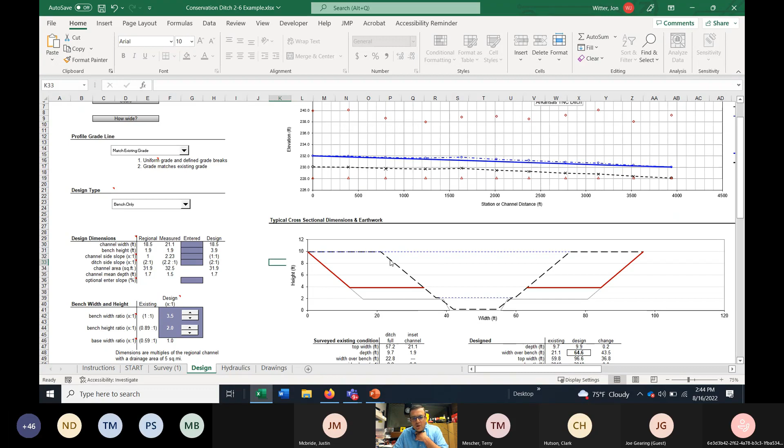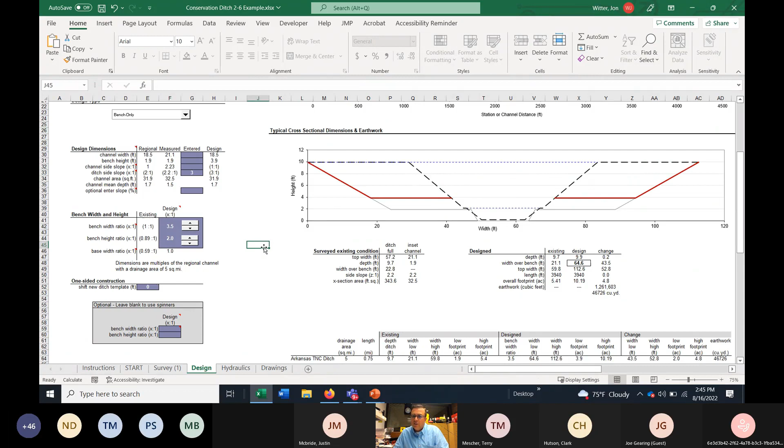And then it will automatically calculate the earthwork volume. So as I make the benches lower, higher, wider or narrower, the earthwork volume will update quickly. You can adjust channel side slope, it's set at 2:1, but if you think 2.5:1 or 3:1 is better for your county, you can just change the side slopes. So you have control over all parts of your design, how high or wide the benches are, what your side slopes are, all those sorts of things.

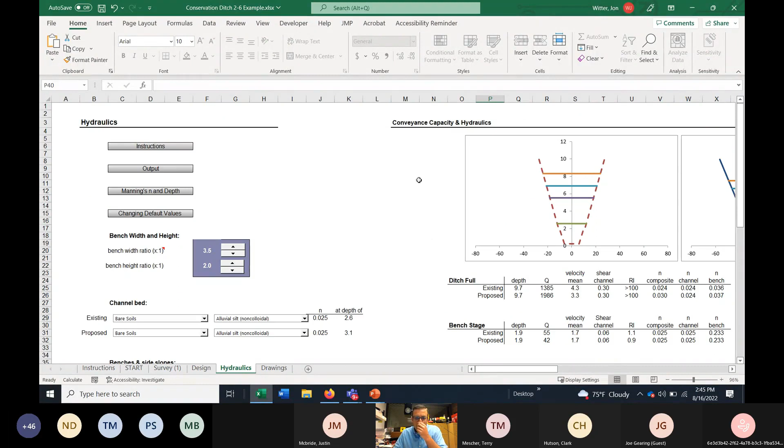We also have a hydraulics page where it'll calculate the return interval of different flows. How much will your ditch hold? We use Manning's equation for that. So you can say if your existing channel has bare soils on the bench and side slopes, in this case they're vegetated, but maybe you want to look at what the flow velocities are as constructed with bare soils. That'll update, and your mean velocities will update as part of it. So you can do your hydraulics, look at shear stresses, look at flow velocities, see if you're getting in the range where maybe you need some erosion control. Or you can see how that changes if it's all vegetated, what's my carrying capacity going to be during that vegetated, unmowed condition.

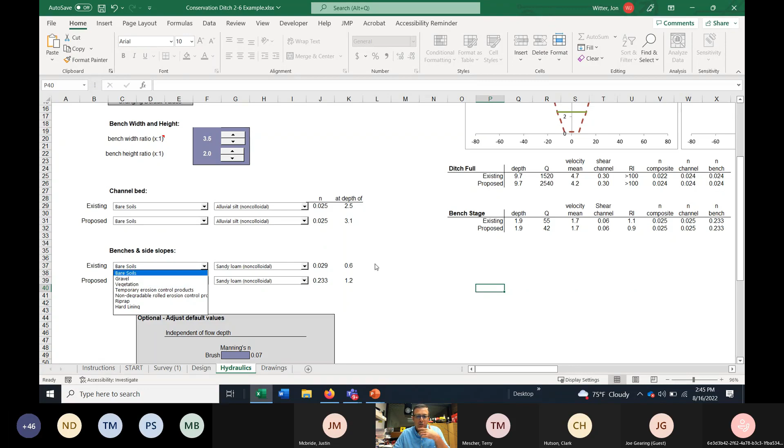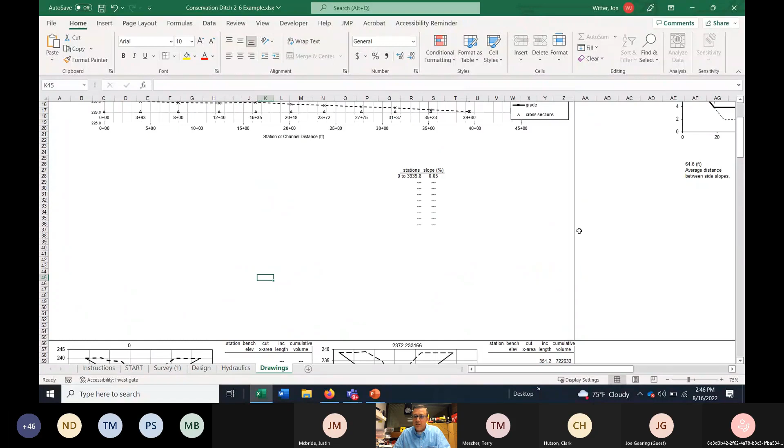And then lastly, we have our drawings page. We've actually had county surveyors and county engineers, drainage engineers in other states just print out these drawings, give them to the contractor, and they'll have their cross sections at each of the stations. Over here, they have just a typical cross section. So like I said, this is a very big ditch further down south where their flows are less dominated by tile flows, and we get these narrower channels up here. They get very wide channels, so don't get scared about those numbers. It's typically going to be much smaller in our Northwest Ohio scenario.

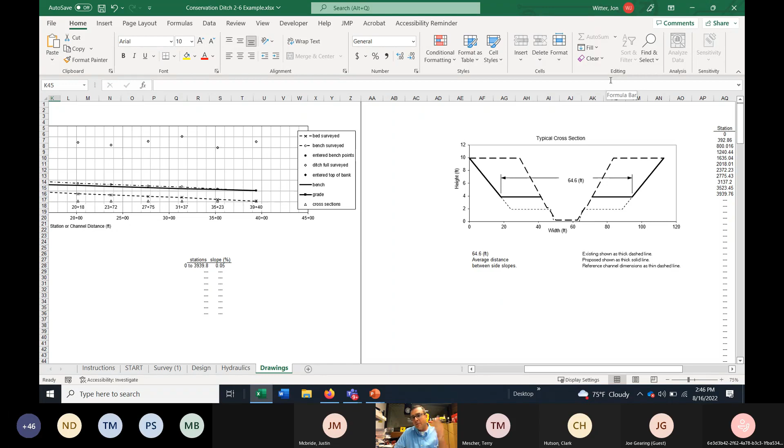So if anybody has any interest in learning more about this tool, we can probably get through it in about 2, 3, 4 hours. It's pretty simple. I teach my students in class over the course of 2 lab periods, and by the second class period, they've done a design, these 18-year-olds. So you folks that have a lot of experience designing channels, I think you'll pick up on this real quick. If it's a tool that's maybe easier for you to use than some of the AutoCADs or those sort of things out there, we'd be happy to help. Let Justin or I know, and we can do a little workshop for you.

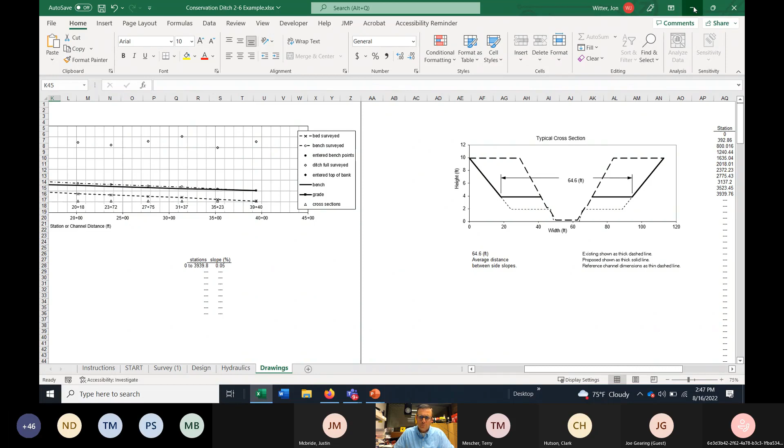Was there any questions about that tool before I move on? There are no questions in the chat. Does anybody have a question they want to ask verbally? All right, great.

And the last thing I'd like to throw out there is this is a pretty significant investment of public dollars, and we want to help where there's problems for the farmer or landowner. Certainly this can help address some stability, some flooding sorts of issues, but we're also trying to help document what's the benefit to society. How do we improve water quality? Issues on maintenance, those sort of things.

So we were fortunate to receive a grant from the Harmful Algal Bloom Research Initiative, and it was really tied to having this program. So it's really nice when somebody's going to build one, we can do research from day one or even before day one. So one of the things we want to do is document the water quality benefits.

One way we'll do that is after construction, if the landowner is willing, we'd like to do surveys, monument some cross sections, and look at the sediment deposition and the formation of that two-stage over time, take some soil samples, see how much phosphorus, how much nitrogen, how much carbon is trapped in those benches. But the other thing we'd like to do, which is going to require a fair amount of cooperation, is go out and use these automatic water samplers. They basically have little bubblers in the end.

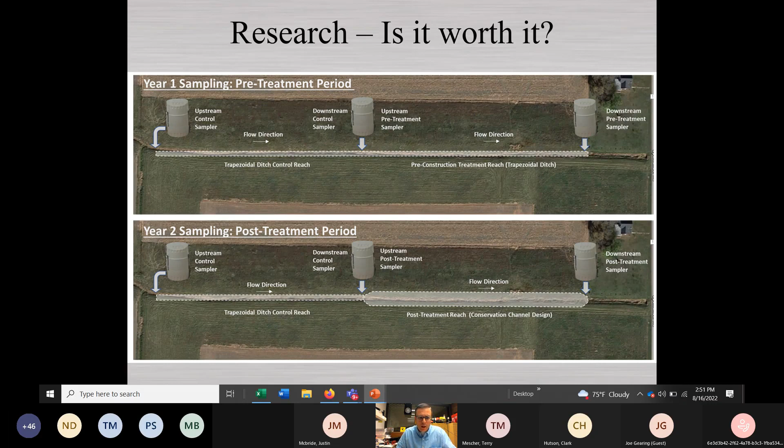So keep in mind, if you have projects and might have willing landowners, please help us establish some research sites so we can make sure good investments are being made with public dollars. That's all I have. If there's any questions, I'd entertain those. Otherwise, I think we may be finished on time or a little early.

The only thing I'll add for the group is the way we'll probably try to handle the research part of this: there is no requirement for any of these projects to be under the research, but we certainly want to partner with OSU and do this as best we can. The way we'll probably approach it is as applications come in, before approval, we'll work one-on-one with the applicant to say, hey, this project might actually be a good site to do some research. Do you mind if we partner with OSU to get that installed?

So it'll be kind of a voluntary basis, but there will also be some rankings where it's one ditch versus another, depending on what we can fund. Certainly the ones where we can get the research on are going to be higher value for us. So just understand we'll work with you through the process, and we'll try to get this imposed on the ditches if possible as we go through. That's the only thing I wanted to add.

Other than that, I don't see any other questions in the chat, unless I missed any, Clark. No, all the questions have been addressed, and there's no more coming in at this time.

I'll end by saying that, again, our goal is to make this program easy. We are paying for ditches. Anytime you go through the petition process and the assessment process, you understand that taking money out of the watershed can be difficult when it's for drainage improvement. So if nothing else, we intend this should ease some of those burdens, but you're going to have other work to do to sell the concept of the two-stage ditch.